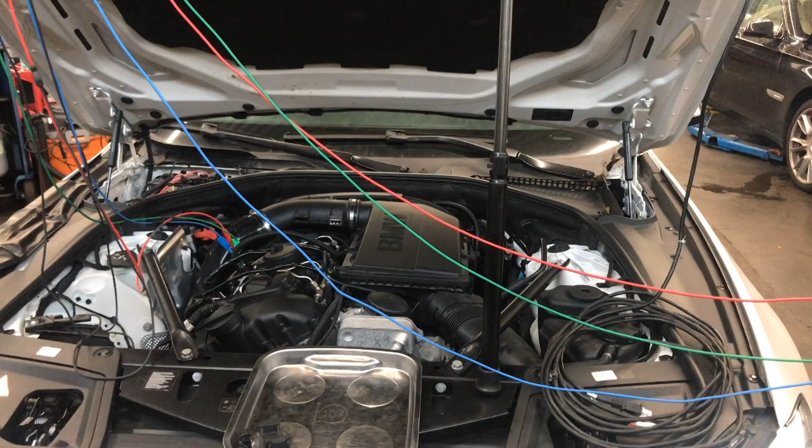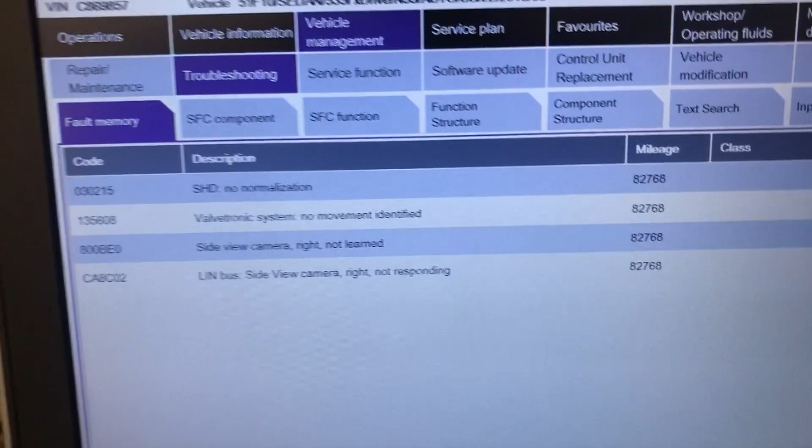All right, guys, keep going with this car. I put everything back together, but the car is still a no start. I went and tried to do a relearn on the Valvetronic, and I get fail. So I'm getting this code, which is 135608 Valvetronic system, no movement identified.

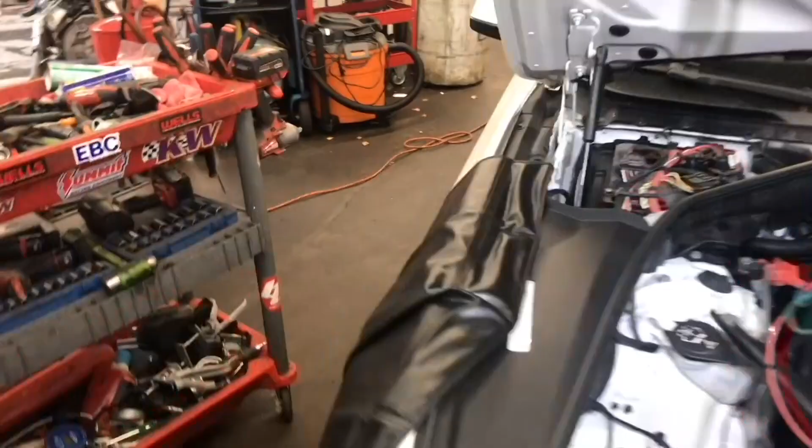So I have my Picoscope connected. This system uses a three-phase motor. So I have, let me see if I can show that in here. Sorry for the shaking and movement. So in the center wires are the three heavy gauge wires. The rest are just 5 volt reference, a ground, and like 5 sensors per position. And the internals, which are the three big heavy wires, are the three phases of the motor.

As far as BMW information, let me show it on the computer. I'm using Identifix, so what it says is just do the Valvetronic run-in procedure, which I try to do, but since there is a code, I cannot follow the procedure. So let me go back to my bookmarks and, sorry guys, I'm going everywhere. I want to try to show you.

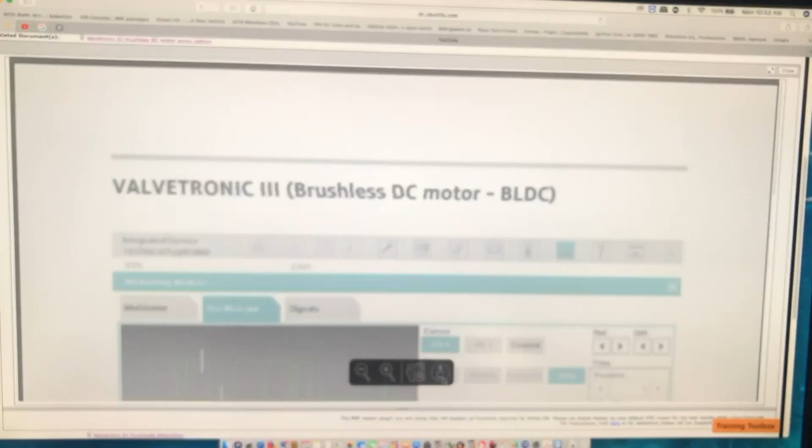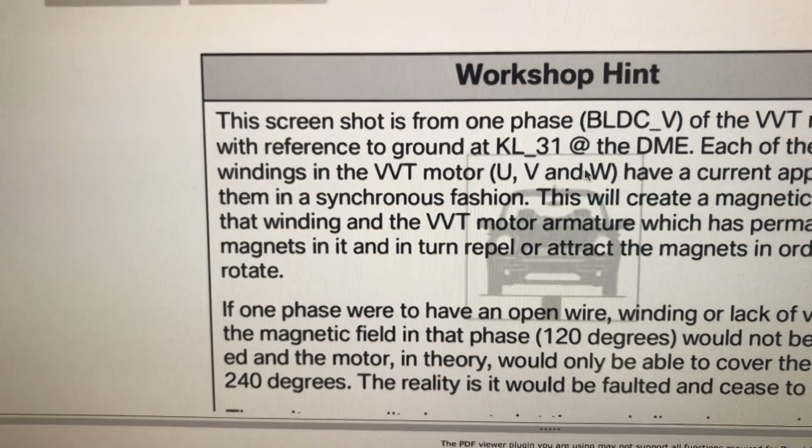Well, let me show you also this. I think is function description. Let me see. No, actually, it is in here? No. Scope pattern. This is good about the Identifix. It gives you a little bit of help on how the thing should look. It says about the three phases, and as you can see here, U, V, and W is a three-phase motor. So let me just move this a little slow so you guys can read it. And that's what ISTA is supposed to be telling us.

Electronic fault patterns. I think this is what it says in here. Let me see. Yep. That's what I wanted to tell you on the second video. After the engine is stopped, the eccentric shaft is in the maximum stroke position. So you make sure when you adjust it to put it there, and they tell you to use an open wrench and move it around, and the Allen key on the Valvetronic motor itself, and put it into the maximum stroke. Well, so I tried all this and it didn't work.

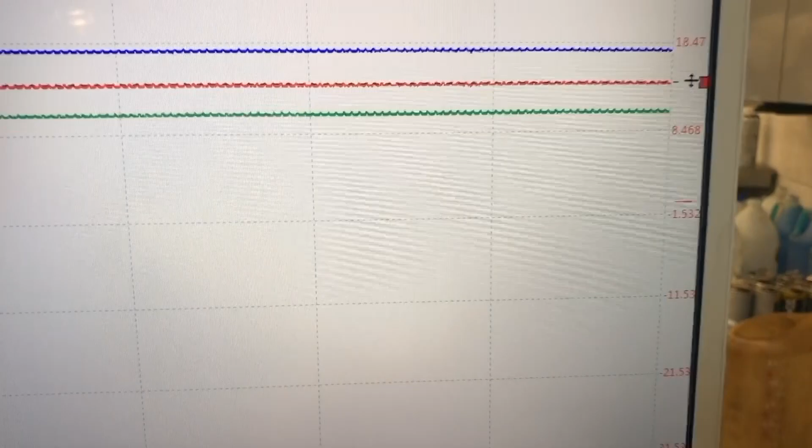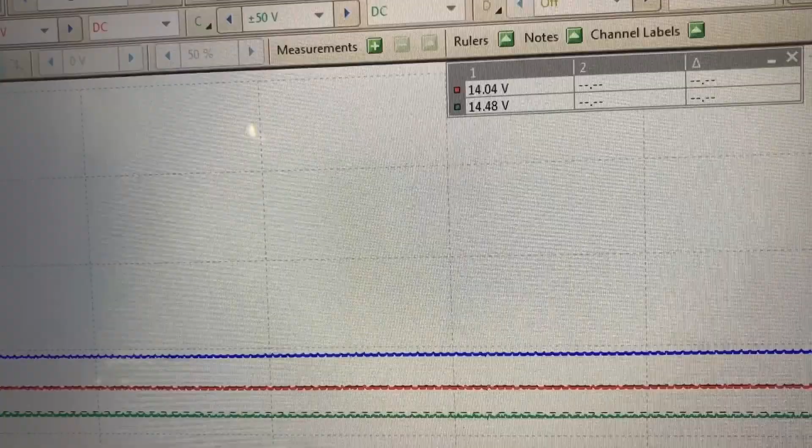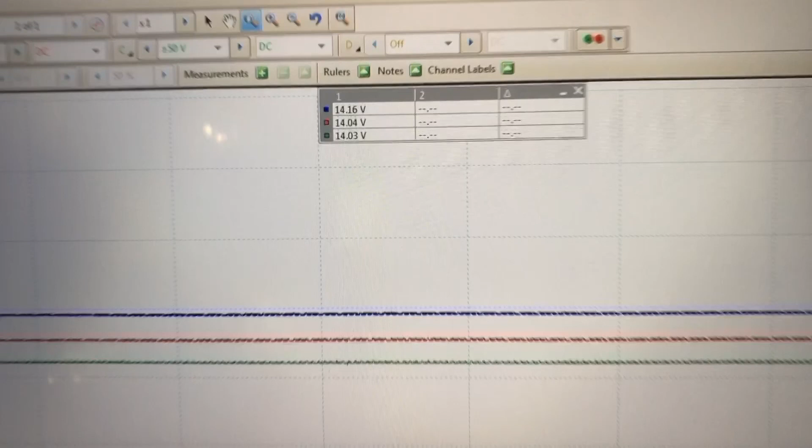So one thing that I have noticed is I right now have the ignition on. As you can see, the power. Let me stop this. Probably not the best capture right there. Let me at least read the red one. It's at 14.04. So 14.04, and if I move a cursor onto each one, it's around the same. It's not going to be perfect, but you can see that they all have the same voltage. And this is with the ignition on. It just stays there. It doesn't do anything.

But some of the procedures tell you to switch the ignition off and wait for the Valvetronic relay to go into the low position. Let me actually put that on running, you will see exactly what happens. As soon as the relay disconnects, I can see a movement on the motor and it's audible. You can hear it moving. So the voltage is steady on the lines, three phases. It takes like 20 seconds to deactivate right there. And you see all the movement.

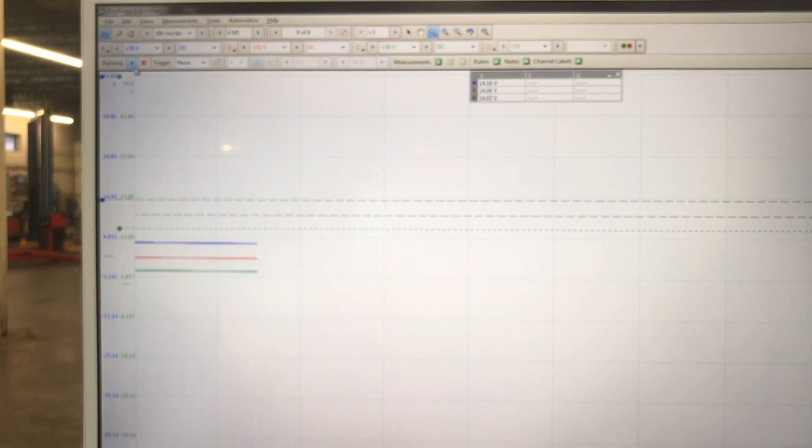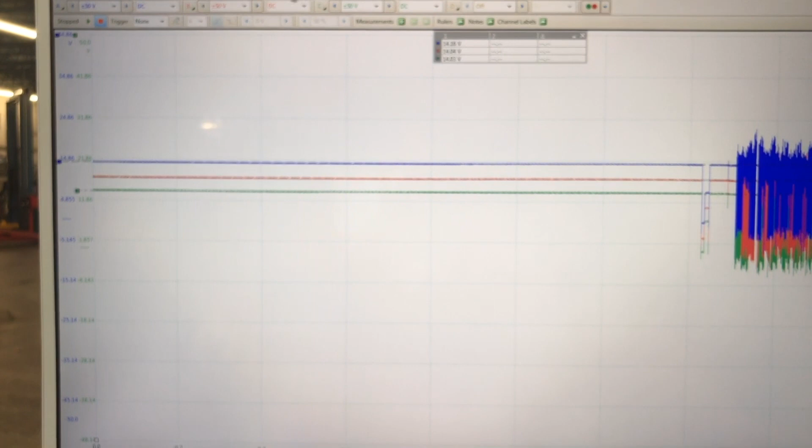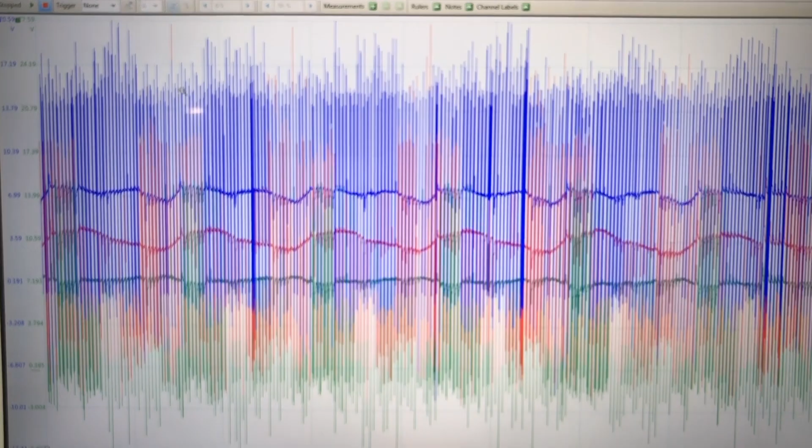So let me stop the capture, go back. I'm playing with the wrong button. So the capture 7, let me take these cursors out. We don't need them now. And I'm trying to do a zoom so you guys can see how this looks.

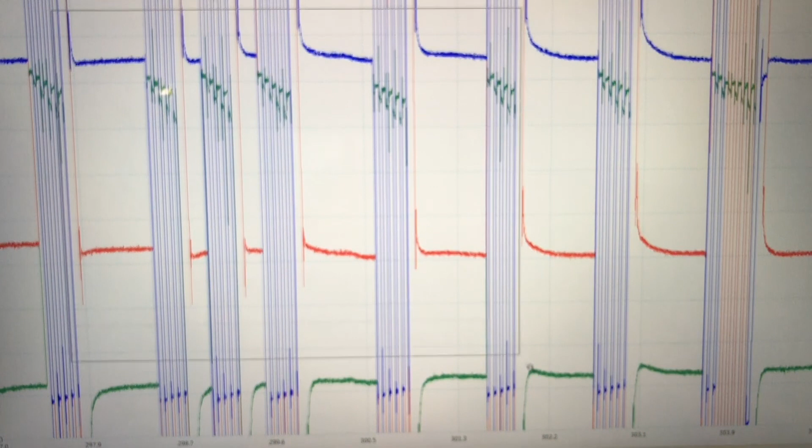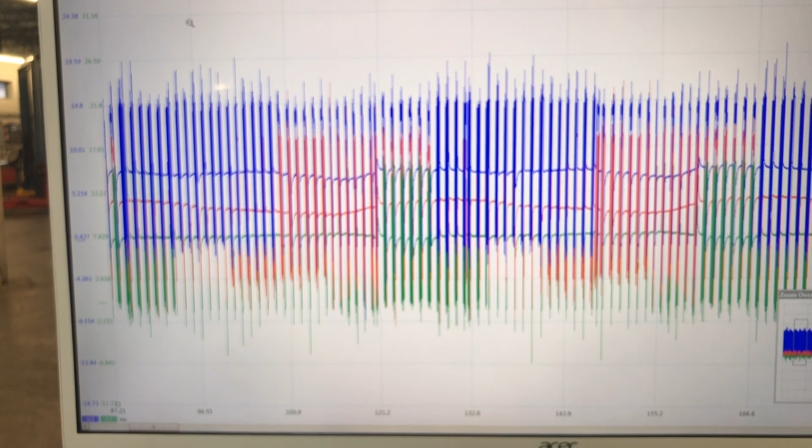And this is how this looks. I don't know why, let me do this again because I went too far in. We don't want to be that far in to see the actual waveform. That's better. Okay, so that's how this looks. I think that's a good capture.

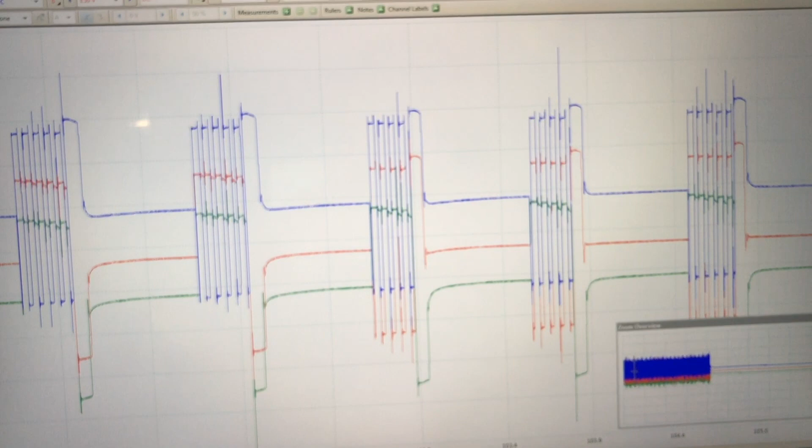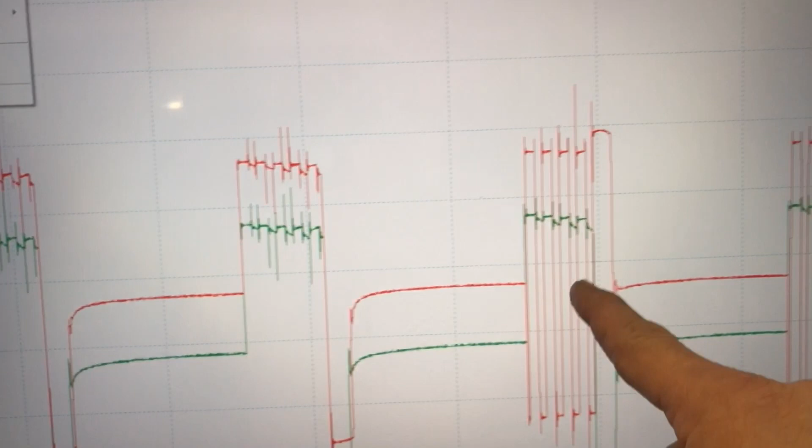Good thing from Pico is you can deactivate the channel. The A channel, which is the active one, is the blue one. As you can see now, blue is active. Right here, green and red are not active, but then red becomes active, and so is blue. So the blue and red are active, and green is not.

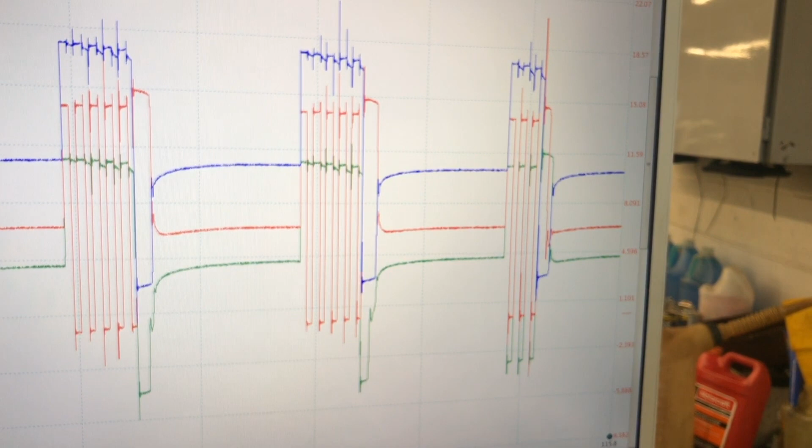So this is the red only. We got only red, and this is a transition. Probably this is the last.

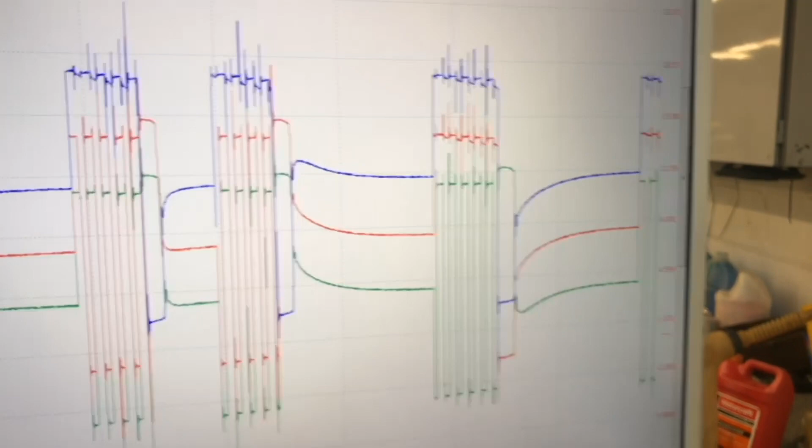Well, you can see it went from red to green. I'm just showing you my captures, and I have seen - okay, now we have blue and green, and before it was red and blue, and that's what it does.

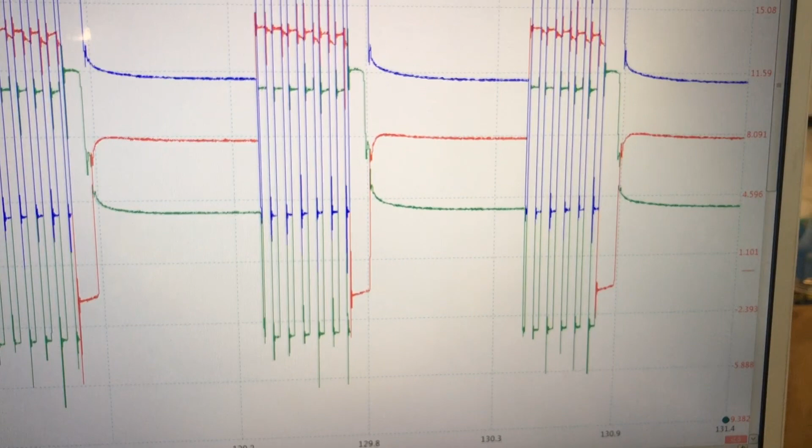So why is it activating the motor with the ignition off? But as soon as I turn the ignition on, like right now, all the signals - let me take the zoom off. Like if I put a cursor onto the green, it's pretty much slow.

So what is this? It says minus 11.69. Huh. Oh, millivolts. I was reading like, wow, minus 11 volts? No, so we're pretty much at zero. If we read the blue one, remember I'm not probably exactly on zero. I'm sorry, I'm trying to put the cursor in there. So we have 8.19 millivolts, so we are at zero.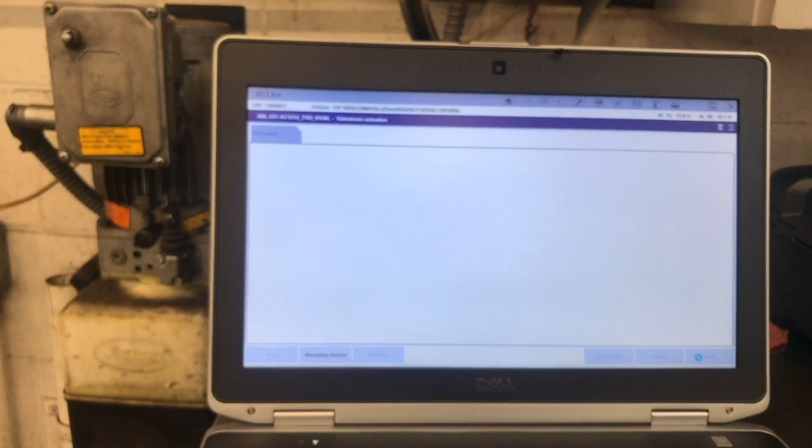So we have movement. I cannot do a relearn. The ignition is on. If I go here and do an ISTA to calculate the test plan, it's going to try to do the activation for the valvetronic. All I can hear is the throttle valve trying to open.

It's telling me to switch the ignition off, blah blah blah. I don't need to do that, I already did that.

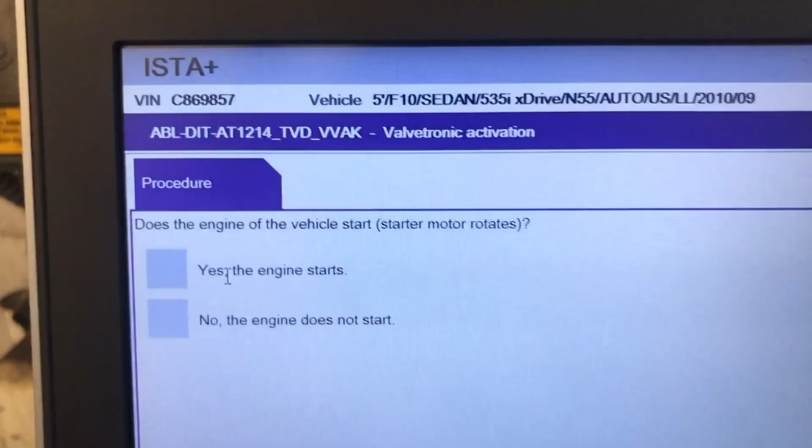Does the engine start? Well, no. But look at the weird - does the engine of the vehicle start? The starter motor rotates, yes, but it's not no-start. But if I click the other one, it's just checking your power.

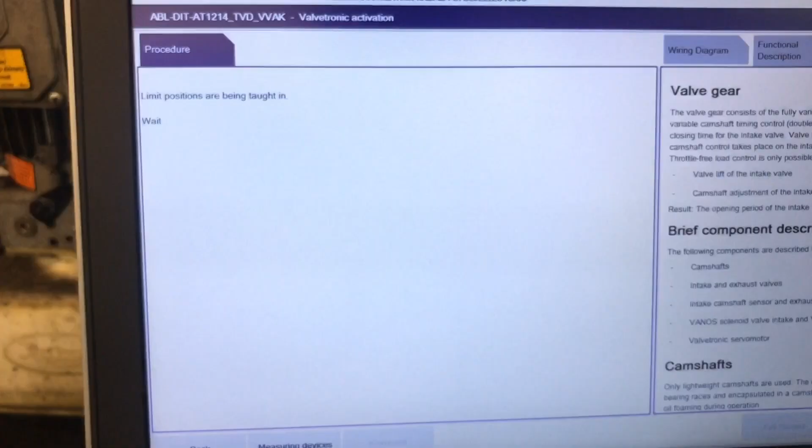So in the following steps, an attempt will be made to activate that. So I will try to do 6 tries or 6 runs. And here we'll try to run it, but it just tells me to switch off because it's no activation.

Then it tells me to switch the ignition off and wait for this start-stop button to go off. And that's when the valvetronic will move as soon as that ignition goes off. Let me show you that again.

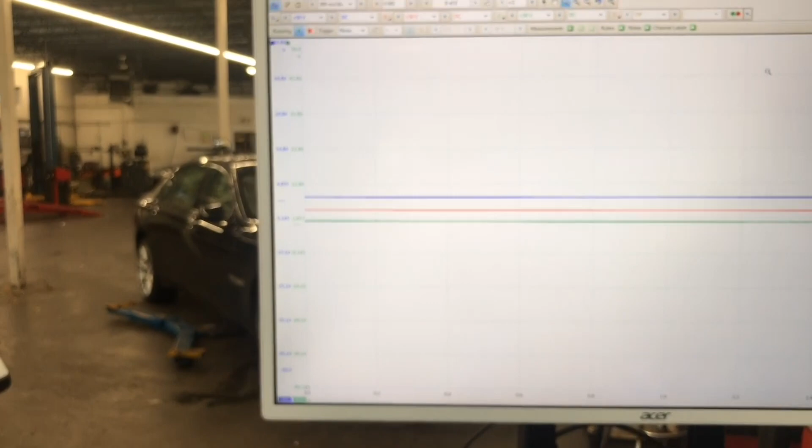You can hear it, and you can see it moved and it went down. So that's what it's supposed to be. Switch off the ignition and wait until the main relay has dropped out, which it has, and then switch the ignition on again.

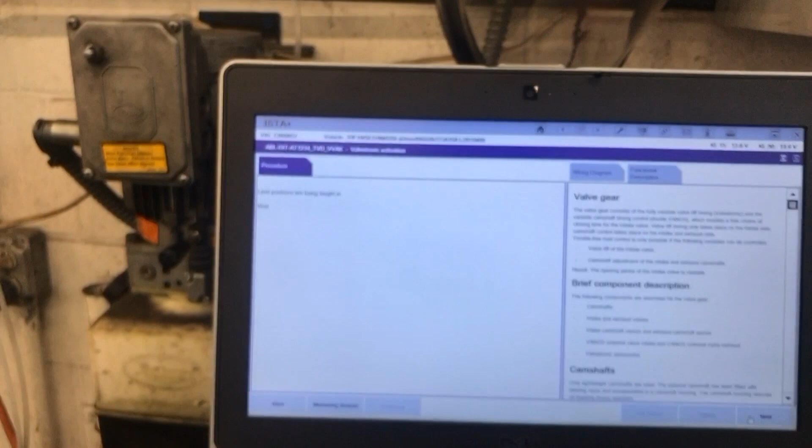This is the relearn. So I put the ignition on. I click next, next - nothing. It tells me to do the same thing again. And it goes like tries and tries, and then...

It says fail. So I'm gonna have to do more homework, or for me, it's either this motor is bad, or it's too much for the computer. I don't know, it's like I have no help here. It's very minimal information.

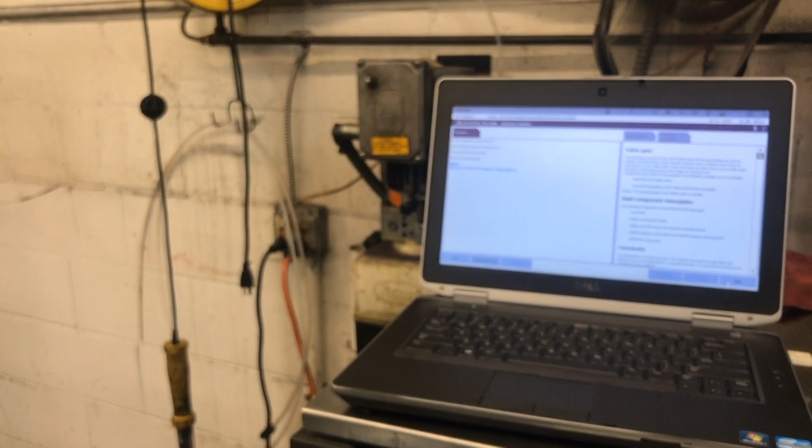So I called my friend Keith. He's actually working on one of these cars at the same time I'm working on mine, and let's see if he can come up with something because he's a guru on all these kinds of problems. We'll see.

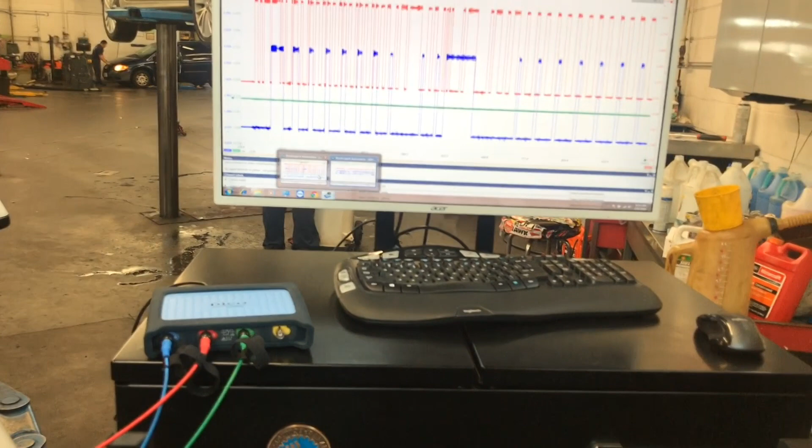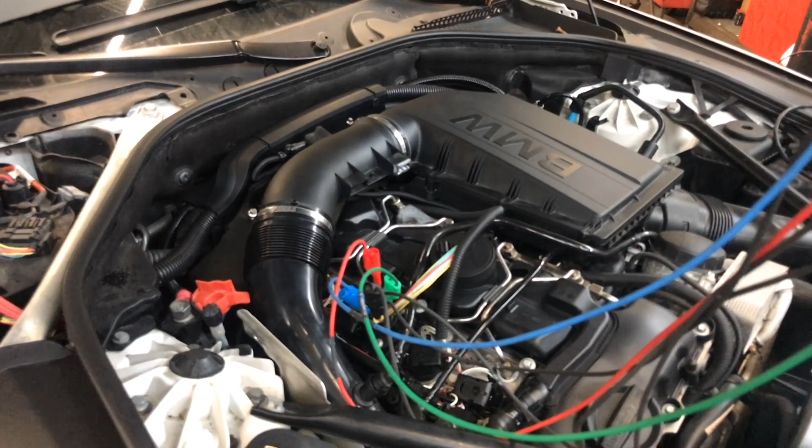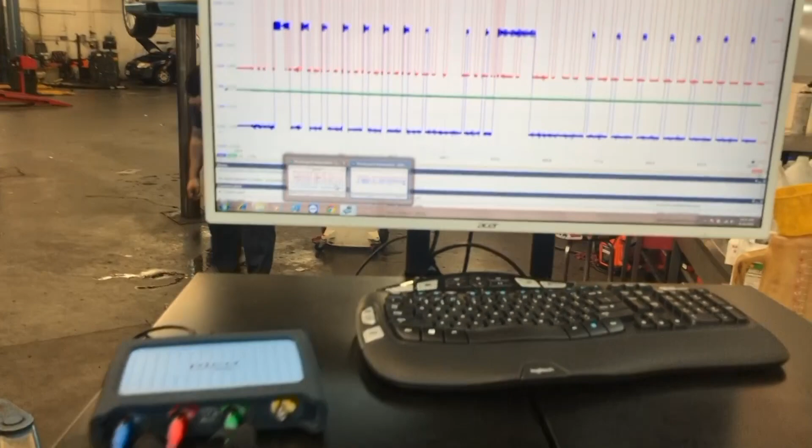All right guys, following up on this problem, I went and now I am reading the position sensors. This motor has 3 position sensors, which share the power, the reference, and the ground. This is how the computer knows exactly where the motor is. So I noticed that one of the wires, the yellow-red, is not producing a signal; it's staying low. Let me show you the diagram.

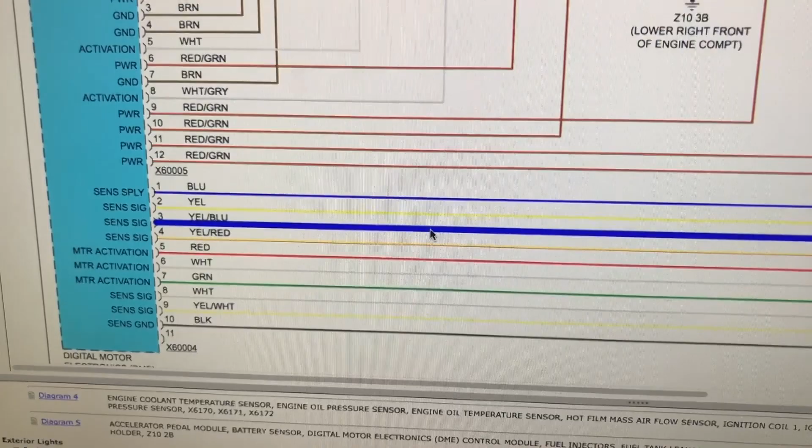So as you see here, let me make sure. We have a blue wire, which is the 5-volt reference or sensor supply voltage. Then we have a black wire, which is the sensor ground. And then we have a yellow sensor signal, yellow-blue sensor signal, yellow-red sensor signal, a white which is a sensor signal, and a yellow-white.

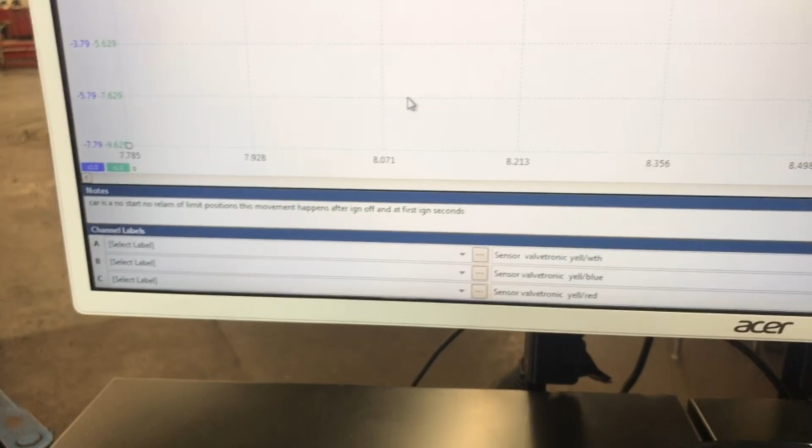So I identify those and save the capture. In this one we have the yellow-white, yellow-blue, and yellow-red. Red is on channel C, which is my green channel. As you can see, we have signal on the blue channel and the red channel, but the green channel is staying low, which right here is reading -11.59 millivolts - let's say 0 volts.

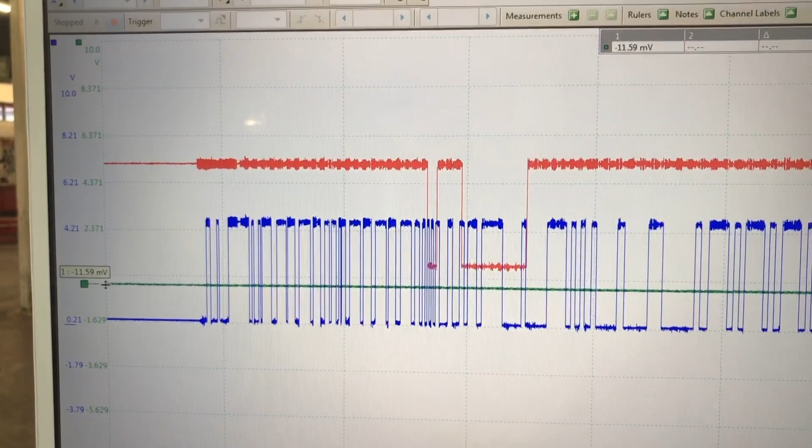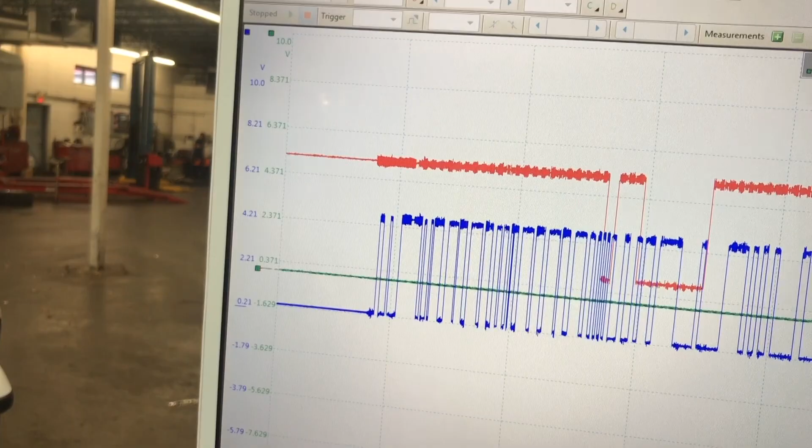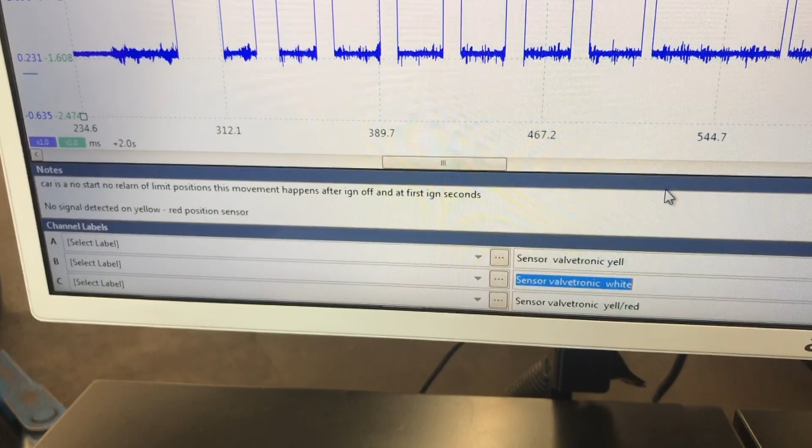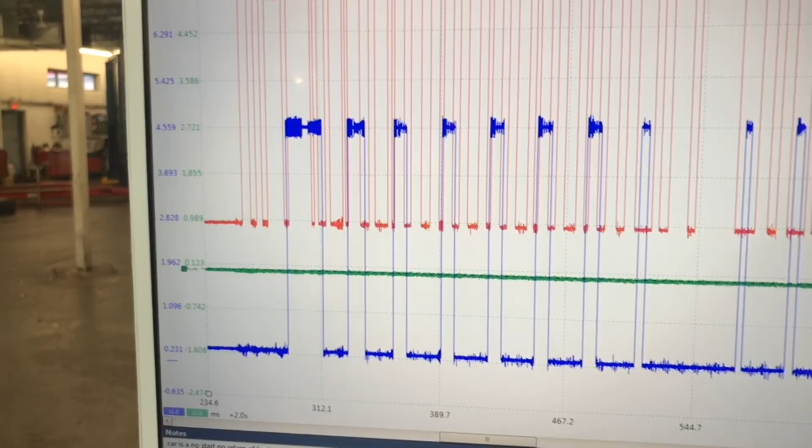If I go over to the next capture - I'm sorry, I have to actually click on it. Now we have, as you can see, on the blue channel the yellow wire, on the red channel the white wire, and I kept on channel C, the green channel, the same yellow-red, and that stays low again. It's like 19.46, so we have no signal there.

So my next procedure, which I already checked before but have to double check again, is whether this wire is shorted to ground. I disconnect the wiring from the motor to the DME and check each of the lines for continuity, and all of them pass. There was no continuity in between. I can pretty much peel off the conduit, and all the wires are perfect. But again, I've got to double check that. So that will be my next step.

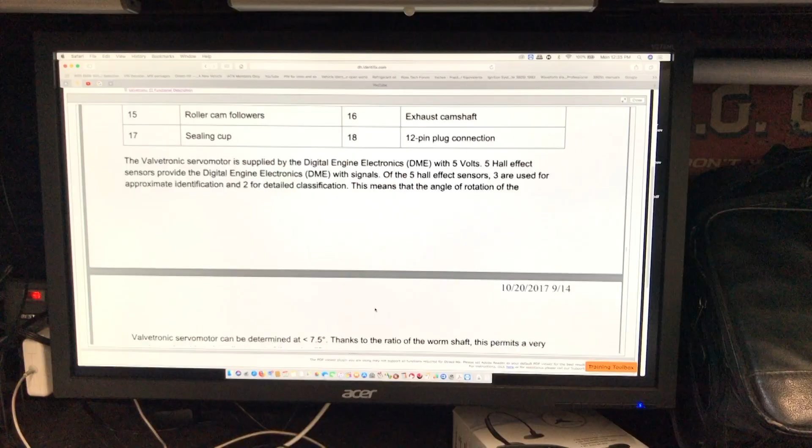All right, yes guys, to add a little bit more info - I'm a little tired, I'm trying to decipher this car. So I want to show you that there are 5 sensors on this servo motor, which are built in.

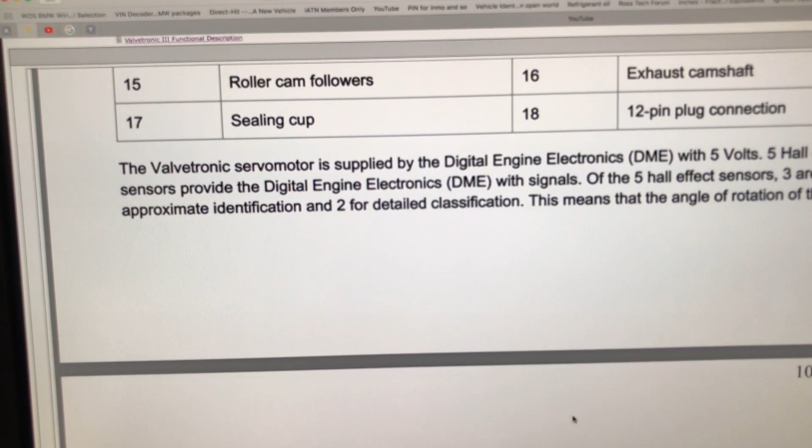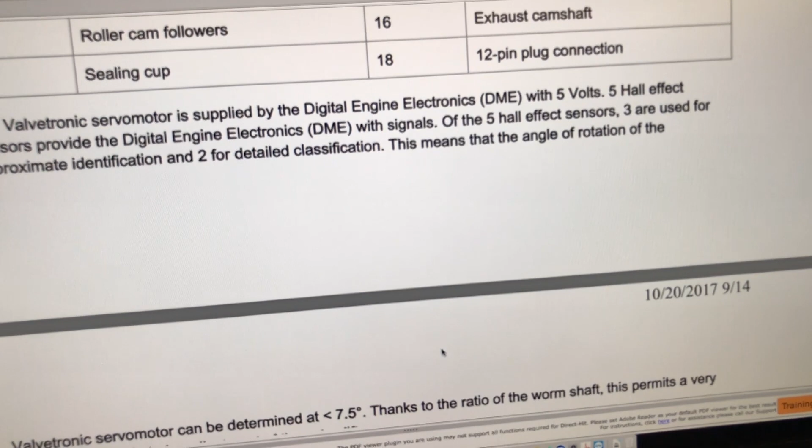The Valvetronic servo motor is supplied by the digital engine electronics with 5 volts. 5 Hall effect sensors provide the digital engine electronics with signals. Of the 5 Hall effect sensors, 3 are used for approximate identification and 2 are for detailed classification. This means that the angle of rotation of the Valvetronic servo motor can be determined at less than 7.5 degrees. So as you saw, one of those sensors is not reading.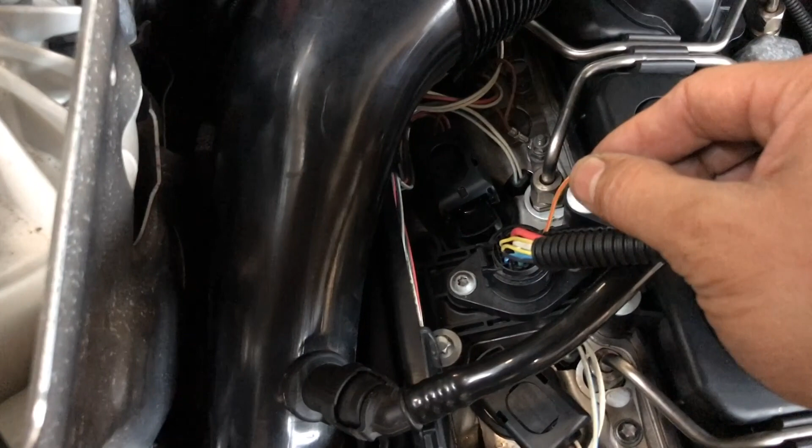So my next test - what I did is I removed that yellow-red wire from the connector itself, and with the ignition on, it goes straight to 5 volts. What that tells me is the integrity of the wiring from the computer to the motor is perfect. And this is the only one that is going low - it's like 19 millivolts, as you saw before in this same video.

So I'm calling this Valvetronic motor defective. It is moving, but the sensor is not reporting correctly, and it has to be all working - otherwise the computer reads no movement. Even though the motor is moving, it's not being seen by the computer because one sensor is either shorted to ground or not producing a signal. It's really not shorted to ground, like I said, because it's just staying low. The wiring is clean, so I'm going to call or ask for another motor. Well, so let's stay tuned.